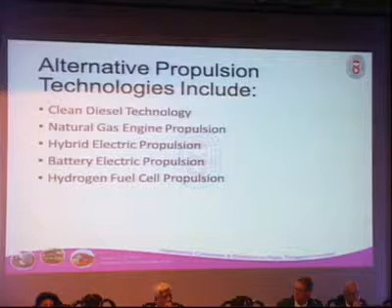When we talk about alternative propulsion technologies, in general we're talking about clean diesel technology, natural gas like CNG, hybrid electric, battery electric, and hydrogen fuel cell. Most of my discussion is going to be on the last two, battery electric and hydrogen fuel cell propulsion, which is where we're focusing in the U.S. with what we're calling zero-emission buses.

Over the years, the United States federal government has provided a lot of programs that have facilitated the growth of these zero-emission bus technologies. As they move into the commercial market, there are ways that our Federal Transit Administration can expand its role in promoting these new technologies, in addition to their capital support for deployments.

I'm not sure if you're aware how buses are bought in the United States, but the federal government funds 80% of the bus purchase, and the transit agency is responsible for 20% of that cost. So the federal government takes a big role—they're taking a lot of risk in these vehicles—so it's in their favor to really implement some of these programs to test out these new technologies.

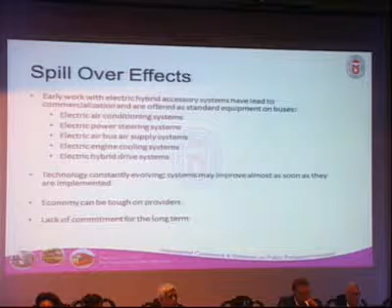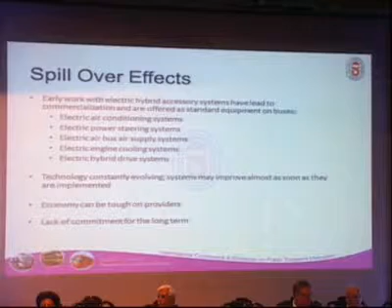And the positives are noted at the top. They're not only important to transit, but also to heavy and light-duty vehicles as well. A lot of these have been tested and there's been an effort to transition some of this technology into the personal vehicle route as well. The last three bullets are some of the negative ones.

It's constantly evolving, as I mentioned. The economy is tough, and there's a lack of commitment, and we still need that commitment.

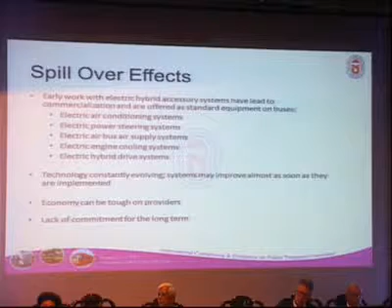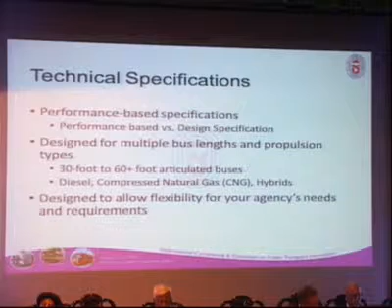I'm going to quickly go through these last couple of slides since I've hit my time limit. One of the things we've done is develop standard bus procurement guidelines, a single guideline meant to standardize a lot of the components and language used in procuring these vehicles. This makes it very consistent so that when transit agencies put together their requests for proposals, manufacturers know what to expect and can give a proposal based on performance, not design. This allows transit agencies to simply say, this is how we need this bus to perform, now you design the bus that will meet our expectations and service needs. So they're designed to allow a lot of flexibility while making the whole process easier.

To conclude, now is the time for the transit industry to be on the forefront of the environmental protection movement and to look at climate change. There's a lot of evidence out there supporting this, and transit agencies around the United States are employing new practices in this effort. Zero-emission buses are on the cusp of commercialization, if not there already. Market development for this technology can be accelerated; it just needs proper leadership and industry support, along with the support of all stakeholders involved in implementing, testing, and running these new technologies.

So it's very quick. Hopefully it's a little bit helpful, and I'll be around if you have questions later on after today, if we don't get to them at the end of the session. Thank you very much.

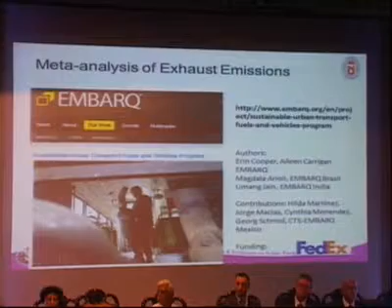These are the vehicle propulsion technologies that are available. Basically what we did—and this research, my colleague Umang Jain is here, received an award at the annual TRB conference last year—brought together data about exhaust emissions from a number of cities. These slides explain why a meta-analysis works; it's not individual testing, but assembling a lot of results from different studies and places, which allows us to give numbers with a sufficient confidence interval.

A lot of these tests were done in international locations, some in Mexico City, and there are a lot of averages involved. Essentially, what the results showed is there is no silver bullet. CNG has its problems, diesel has its problems, and what you essentially need is post-processors, which help a lot. Hybrid and hybrid electric are definitely better than CNG and diesel, but then there's the cost element. You can achieve a lot in cleaning up both CNG and diesel, and diesel with lower parts per million if you use post-processors. The DPF, the D50, the SCR—these are all post-processor technologies that have been used.

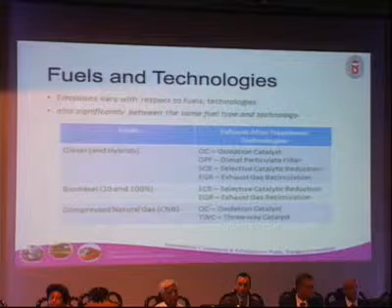So I just wanted to show you, the general finding is that technology and diesel quality are extremely important, and you need to analyze everything in the local context with these three parameters in mind. These are the various post-processor technologies that are available, and I think we really need to find a way to make sure after-treatment technologies are a part of the process. So just giving you examples of parts per million.

Now Europe and others have gone to 10 to 15 parts per million of diesel. This ultra low sulfur diesel is extremely clean, and once you use it with DPF filters, I think you get much better results.

The other thing I've also personally noticed, CNG engine technology, for example in India, has really not evolved. We are using 20-year-old CNG retrofits with clean fuel. Year 4, year 5 performance - this is what I've personally seen in Indore where we've worked closely - year 4, year 5 CNG vehicles perform really poorly. Maintenance costs are sky high, and it's a big impact on the business of the operators.

So that's where, with diesel, they are actually happier to use diesel because it's easier on maintenance as the vehicle gets older. So I think one of the other things is we need to look at life cycle as well, and not just look at the point of time when it's purchased.

And of course, India is also now, the major cities have all moved to 50 parts per million, and now with these NGT orders, etc., we'll move more and more to cleaner diesel. So I think if you want to persist with CNG, there has to be a big push on actually having better CNG engines, because right now we're using really low quality CNG engines and CNG retrofits.

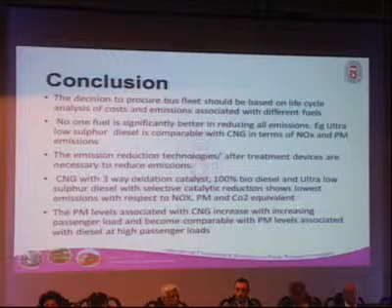Yeah, and just a couple other things I wanted to quickly show, since these are about electric.

A point to make is, I know electric buses are there, but the big problem is our power, our energy is very dirty. If you're going to use dirty coal to run electric buses, that's not going to solve any of your problems. So I think what now, this is something they've been doing in Japan, etc., where they're connecting to smart grids - you need to essentially connect your electric buses to your smart grids. Otherwise, it might still have a positive impact on exposure to criteria pollutants, exposure to PM 2.5 in cities. So you have health benefits, and you are starting to see results from New York, etc., where asthma rates have gone down once they've moved to electric, especially around the major arterials.

But the point being, if you're using dirty coal to make your electricity, then it's like you're just moving the problem from the cities to somewhere else.

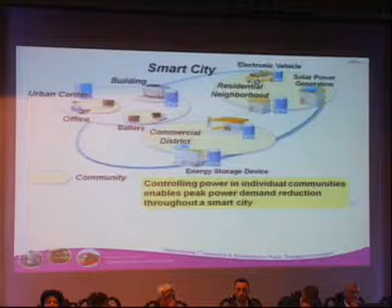And then on biofuels, I think this is also research, I know there was a lot of talk about biofuels. This is actually research that we've done as WRI, mostly from a food perspective. This research was done mainly to talk about a sustainable food future, and food security is a big problem. Based on a very extensive study done in Brazil, it's extremely clear that we cannot use land that we need to grow food to grow fuel. It's very clear, so that's an extremely important point. From that perspective, I think biofuels, it's okay if we're using waste to biofuels, but to grow crop for biofuels or for ethanol is really not going to work from a food security perspective.

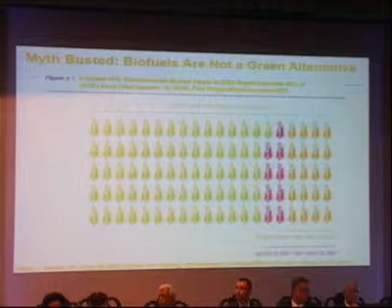Food security is going to be a big problem very soon. Water security and food security. So from that perspective, I think biofuel also has to be carefully thought through. Again, it's nice to be 10%, things that are coming from waste and waste to energy type of stuff. But to grow fuels for crop, there's a huge issue, and I think that needs to be thought through fully.

I'll give you an example from Bangalore, and that will be my last point. BMTC is moving to BS4 and now BS5, which is a big order from the NGT. Everybody has to go to BS4 and BS5 by 2017. Fuel efficiency dropped significantly when they moved from BS3 to BS4, and the cost of that fuel inefficiency was about ₹500,000.

Where does BMTC stand today - the thing is, one is capital cost, the other is operations cost. BMTC anyway, all the talk of profit making has gone in the last couple of years, and this additional cost from the fuel inefficiency became very difficult to justify. So when we're talking about moving to higher cost technologies, we also need to talk about how we make sure the subsidies and the operational subsidies are in place. Otherwise, we're going to have problems on maintenance, etc., and deterioration will be much quicker.

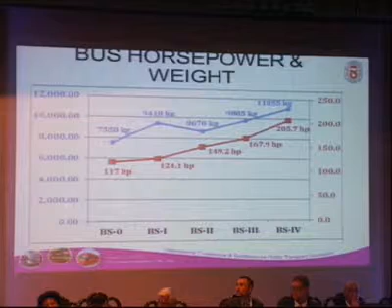So these are the main points I wanted to make, and I'll end on a positive note. Bogota, which is a developing country city, has the largest hybrid electric bus fleet, 200 buses. So it's possible - some of them mostly run in the BRT corridor.

It's possible to do it, but first, I think post-processors are extremely important. So we need to find how we can create a market for post-processors in India. Today there is a single additive supplier who charges exorbitant rates. So one priority is pushing for post-processors and making sure there are multiple suppliers that can do it.

Second, really think about life cycle costs and the impact of operations on the operators, and how we're going to arrange for subsidies to cover it. Third, there are some good progress being made in the electric hybrid space, and we need to figure out financial models to start making them part of our fleet. So with that, I'll stop. Thank you.

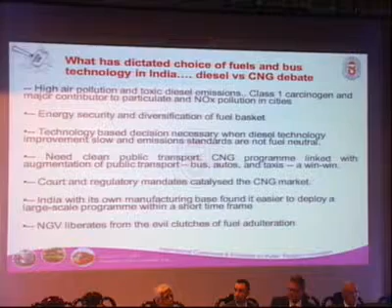CNG also made a lot of sense at that point given huge concerns over fuel adulteration. When this order came, linking clean fuel with public transport augmentation, for us it was a win-win in the year 2000. So this was the data that justified the move, and also showed why CNG at that point was a way to leapfrog our emissions.

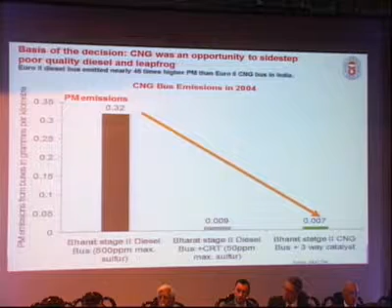What you're seeing here is a study carried out, a test carried out by ARAI along with TERI, which shows how the Euro 2 diesel bus at that point in India was emitting 46 times higher particulates compared to a comparable CNG bus. It also made climate sense, since everything gets tested within the framework of co-benefit.

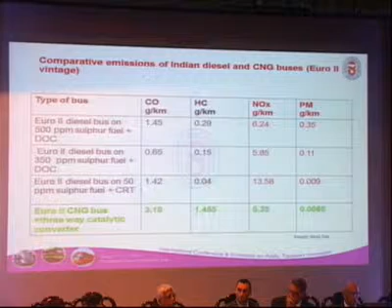So if you look at the data from the same tests, look at the CO, look at all the parameters, it justifies the move towards CNG. There were concerns that whether methane is going to be an issue from CNG, because if you want to take climate as a benchmark to test its success, this very interesting study came up that said that with CNG, methane emissions might have gone up.

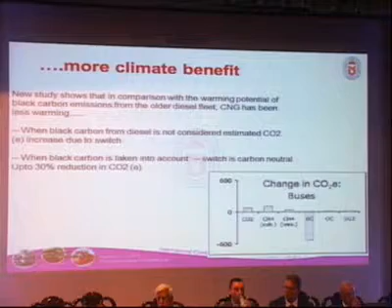But if you consider that the CNG fleet has replaced old diesel fleet, and you take into account black carbon, the warming potential of which is enormous, then at the end of the day the net result is that the CNG program in Delhi could actually reduce the warming potential by up to 30%. So clearly, that was the basis on which we established this program.

There were glitches and there are lessons, because any new technology, any new fuel will require its own ecosystem, its own standards, its own maintenance regime, its own fueling systems, and there were many glitches we had to face at that point of time, but a lot of things were also overcome. And those lessons are there for all to see.

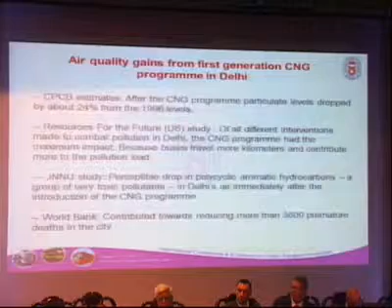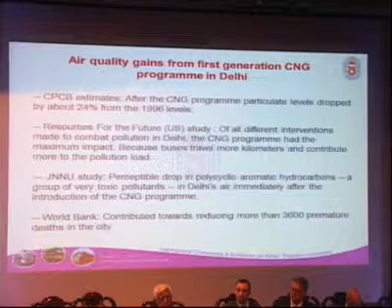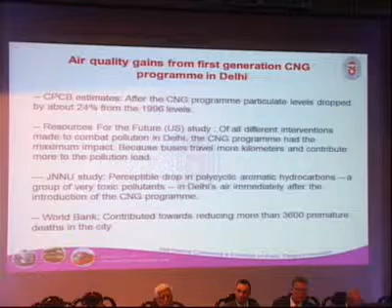And finally, what we got out of that first generation, also the primary driver of this program, was air quality and health. So all these studies, and also the estimates available from the official State Pollution Control Board and the Central Pollution Control Board, make it very clear that we also got the air quality gains.

Now the questions are, that was the first generation. Today we are facing the second generation challenge. We know today that we have arrived at a stage when buses are Euro 4 compliant in many cities. We know that today the CNG program has a potential to expand to several other cities, in fact a very large number of cities. Already 60 cities in this country have access to natural gas.

Now from that perspective, how do we look forward? And how are we now going to make our choices? The first choice was made when we were at Euro 0 level. Now today we are at Euro 4 level, and we are looking forward, and we expect both CNG and diesel to improve. So how are we going to make choices today?

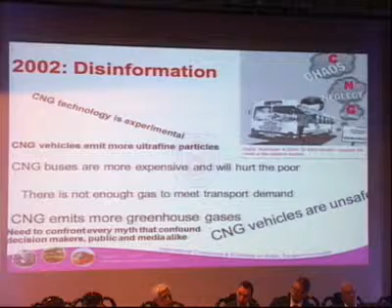All the time, even during the earlier period, we had to face a lot of disinformation over CNG. There was a lot of lobby pressure saying why CNG is not going to work, why there are so many problems with CNG, and it was always about finding fault with CNG, even though today all data shows that we have got enormous air quality and public health gain from that program.

So just a few days ago, the media again became abuzz with one statement from CSIR based on one of the very recent studies claiming that CNG emits more nanoparticles than diesel. And therefore the red flag was up, and the entire media again hit the same controversy. So when we delved and investigated, trying to find more about this study, we were actually pleasantly surprised. When we got the data from CSIR, we found, and we were very surprised, that the right messages had not been given out from that study.

If you compare all other parameters, and in fact we have not done this comparison, it is a CSIR study, the data actually shows that the CNG buses are already pretty close to the levels we have for Euro 4. Where they made that observation about ultrafines being more than diesel from CNG is when they compared this with an advanced Canadian bus meeting the 2010 heavy-duty emission standards of the US, fitted with particulate traps and SCR. Compared to that, they found our conventional CNG bus emits 12 to 40 times higher ultrafines than that Canadian bus, but our Euro 4 diesel bus emits 28,000 times higher ultrafines than that Canadian bus.

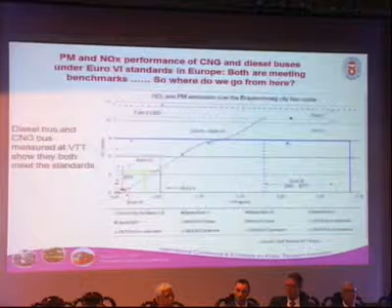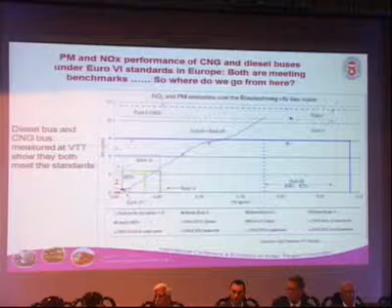So from that perspective, let us be very clear that the data from them is very powerful. And therefore, when we looked around the world at the VTT study for NOx, for PM, for ultrafines, and looked at where all the current bus models are, it is pretty clear there's an enormous potential of that technology to deliver on emissions and environment. And this is fascinating to see at what level diesel buses begin to become comparable with the CNG buses. I'm not going to read this out, but it's pretty clear out there.

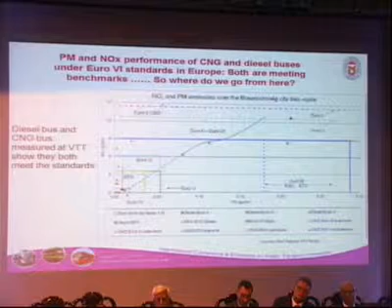Now the point is how this technology roadmap is evolving in this country. The matter of concern is that we still do not know when the Euro 6 emission standards are going to be in place, because the Government of India has not announced the emission standards roadmap yet. So we do not know when clean diesel is coming with the trap. If Euro 6 comes in 2023 or 24, or Euro 5 in 2021, that means for another 5 to 6 years India will not have clean diesel, and if that technology does not evolve to address the issue, that creates more opportunity for CNG.

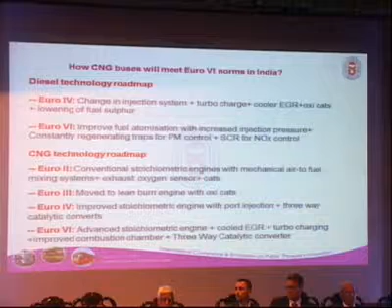CNG technology has already evolved. If you look at the CNG trajectory, and I will differ from Madhav on this, we have moved from the simple conventional carburetor to first the lean burn, and then post-2010 we have already moved to the more improved stoichiometric with three-way catalytic converters. So the data shows that the technology we have today has much better potential to meet the tighter standards more easily.

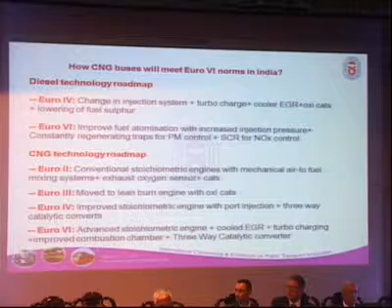This is a question we looked at, just an example from one company: when a bus operator has to decide, and has the option of accessing CNG, they have to look at the complexity of the technology to meet the same emission performance. With CNG, just by improving lambda control, three-way catalyst, and engine management, that's how CNG will move ahead to meet Euro 6. Whereas the complexity of diesel after-treatment, starting from the oxy-cat to the particulate filter to the AdBlue injector to the AdBlue mixer to SCR, and understanding what this complexity means, it's not going to be easy, both in terms of maintenance.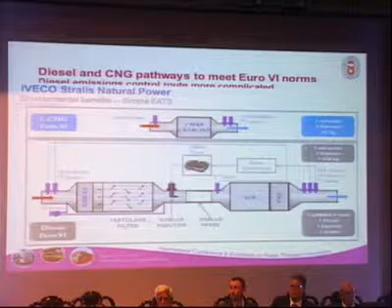So much has been said about maintenance of CNG, because we do not have diesel buses today with complex after-treatment systems. But when we begin to get that technology, given the maintenance regime that we have in the state bus transport undertakings, it is going to be an enormous challenge.

So finally, what I would like to say is the message is pretty clear: cities that do not have CNG will certainly have to leapfrog to Euro 6, because only at Euro 6 level do you begin to get effective reduction in both particulate matter and nitrogen oxide. But if you do that, it is absolutely essential to have a very stringent in-use compliance strategy. We know there are challenges with low-load, low-speed urban driving conditions, where for some time your after-treatment devices are not going to work effectively, and you will have uncontrolled emissions.

And at the same time, complexity with urea refilling etc. will be a challenge. Those who have access to CNG, it makes immense sense for them to move on the CNG path, and there are a whole lot of other alternative fuel options emerging today that cities should be looking at. Of course, for CNG cities, you would also require a maintenance regime, but we need to keep in mind this will be much simpler than managing diesel technology in the future. Efficiency is also an issue we've just heard about.

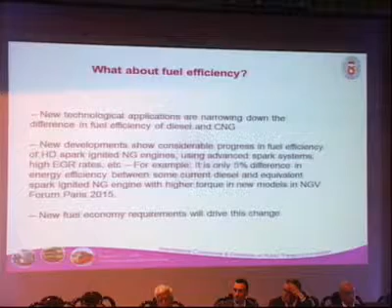But if you look at how the technology is evolving today, we are seeing a dramatic narrowing of the efficiency gap between CNG and diesel. In fact, in the very recent demonstration by Scania, we found it was nearly 5% difference between their CNG model and the diesel model.

So my final point is that bus technology is evolving dramatically, and we will have to benchmark that. It is absolutely essential that we understand the cost and technical complexity of both diesel and CNG. CNG certainly shows a much simpler way of moving forward, but this does not mean we are saying it's CNG versus diesel. We want a fuel-neutral approach, and we know a fuel-neutral approach happens only at Euro 6 level. So instead of fighting this as CNG versus diesel, please demand a quick leapfrog to Euro 6 - that's where the community has to become unanimous in making that demand.

And with that, for all alternative technologies that we are going to be discussing today, not just CNG, be clear: we need a legal mandate, we need fiscal and regulatory measures for market development, we need favorable taxation policy to make them compete with cheaper and dirtier mainstream technologies. That has to be the focus of moving forward.

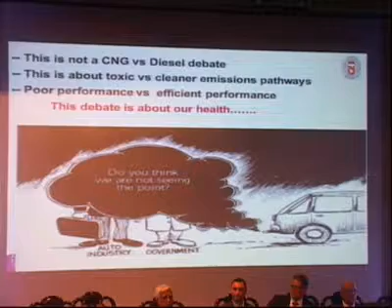So clearly, this is not a CNG versus diesel debate. This is about toxic versus cleaner emissions pathways. It is about poor performance versus efficient performance. This debate is about our health. Thank you very much.

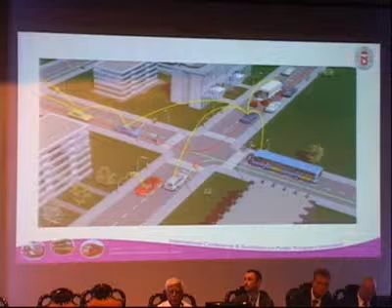Today we see that the environment is really going from bad to worse, because the oil usage left is only for half a century. 56% of the world's oil consumption is from transportation, and 95% of the world's transportation is powered by fossil fuels. So we are really consuming what we have in short supply. Therefore, we need to use it well, and we really need to see how we can preserve it for the essential commodities and the upcoming generations.

But what we can do is look forward to why alternate fuels, because alternate fuels today for us are environment friendly, they are clean and sustainable, and they look forward to supporting us in preserving the conventional fuels. We have the requisite technologies today available with us which can really cater to our requirements and applications in different industries.

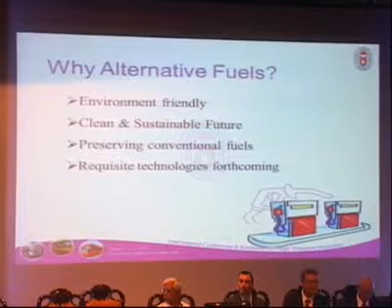Recently, just about a year back, there was a study done across 40 different countries where they looked at all different kinds of fuels being used. Different countries, depending on applications, cities, their demographic and geographic requirements, gave this data, where people feel that whether it's natural gas, hydrogen, hybrid or electric vehicles, or biodiesel, would be the real solutions in the future.

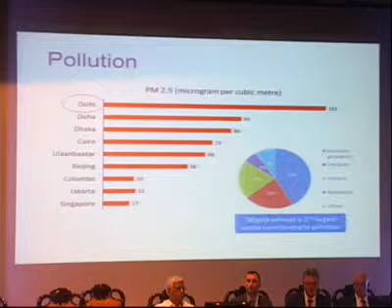Because today when we see key cities across the world, Delhi is considered the most polluted city, where the PM is 153, and just now few people were talking about bringing it to less than 15, which is something we are looking to move towards. But is that really going to happen without taking certain steps? That is very essential for us to really make these moves, whether by SRTUs, whether by governments, or by us as a public.

Alternate technologies are key. Today we have many possible approaches, but how many of them are viable? Any particular customer or end consumer is looking for something very sustainable, scalable, and affordable, with the right level of safety and comfort. So how are we able to give that kind of safety and comfort at an affordable level to people in India? The challenges across different cities really require a unique solution, so we have to see which technology can be adapted by us.

Today current trends are that in different countries, hybrid and electric vehicles, fuel cell, ethanol and biodiesel based vehicles are being used. Even today we see a few such vehicles here, as the Honorable Minister shared his vision this morning, and how the government is moving towards that and is bent upon making it happen. But how we as an industry, whether as manufacturers, end consumers, laymen, or as SRTUs, are gunning towards it, that is the key.

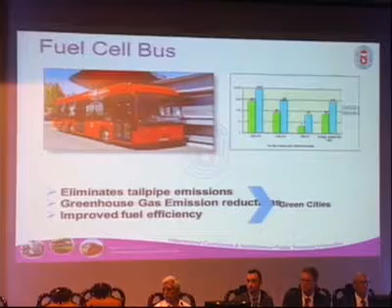If I talk about fuel cell buses, definitely they have their own benefits: elimination of tailpipe emissions, improved fuel economy, leading to green cities, and greenhouse gas emission reduction as well. But is it affordable today? Is the kind of infrastructure which needs to be put in place there? How are we able to do it? These questions arise.

Then we talk about green mobility, mainly coming from electric and hybrid buses - how the zero emission operations, or the diesel auxiliary power unit, or the range-extending system with the diesel engine is there in the battery bus. But as we heard before, are all these things coming with the right source of generation of energy, even if it's an electric vehicle? That is very important - how we are really seeing the right source of energy for generation, whether it's coming from any renewable resource like solar, wind, or so forth. Only then are we actually giving a green vehicle with the right technology, because ultimately the environment as well as health is a very important factor for the public.

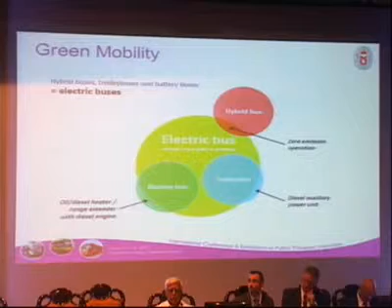The complete supply chain needs to evolve - we need to see how we are able to bring costs down, how technology is evolving daily, how it's becoming affordable for the end consumer, and what really makes sense for the whole ecosystem, whether it's charging, the supply chain, the ultimate product, or the operational aspect. All these are big challenges which need solutions from us today. But all these solutions would not come just by looking at a complete ecosystem solution in one go - we'll have to take requisite steps for the same.

Today when we compare diesel, CNG, hybrid, and electric, we clearly see there is a big cost saving in terms of energy in case of electric, and partially in case of hybrid. But how are the SRTUs able to buy such buses and ply them on the roads? How is the complete team of drivers and operators going to use these buses, and how will training be imparted to them - that's a big question mark.

But more than that, I think even if we get these vehicles on road, the big question lies with the charging technologies, because the whole ecosystem needs that kind of support. The government would need to give that kind of long-term vision to the people, as we heard this morning from the Honorable Minister. If we talk about the cable and plug technology for charging, it needs 16 to 100 kilowatts of charging power - so are we able to give that kind of quality power?

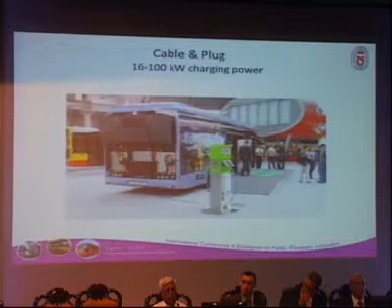Similarly, the pantograph solution, which is spreading very well and is a solution of choice in Europe, but the infrastructure needs to be put in place - it's a dedicated corridor where multiple different vehicles can charge with the pantograph solution. But the power requirement is about 450 kilowatts - so are we ready for that quality of power at that source level? Because with one system deployed, it's a one-time investment, and then on an ongoing basis we can get the benefits, and those benefits can be reaped by multiple application vehicles.

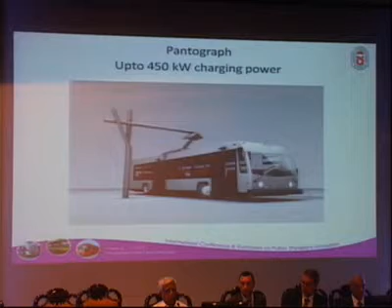Similarly, we talk about induction charging. It needs about 200 kilowatts of charging power, but the technology is evolving and still not stable. The know-how people need, as well as the system which needs to be deployed, is very cumbersome. So there's still a lot of time and money which needs to be invested in this technology to make it more affordable.

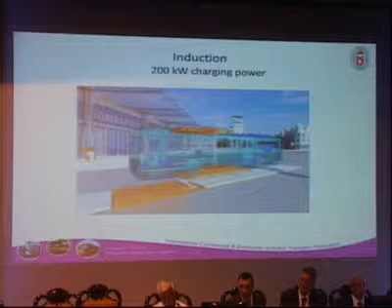But ultimately we need to see, from our perspective as an industry, how we are giving a solution which is economically viable. So if we compare diesel, CNG or electric, we see that the running cost, operating cost in electric vehicle is about one-third of diesel and about half of CNG or hybrid. That is the right solution which I feel can be good for a country like India.

But we definitely have to see how we can localize such products, how the infrastructure can be provided by the government, and how a sustainable and scalable methodology can be deployed. New schemes like FAME and the upcoming NEMMP will be testimony to what the government is looking for in the future.

With these kinds of buses, we see that fuel saving is about 81% more than the diesel bus and about 47% more than the hybrid bus.

The Prime Minister has already spoken a lot about the import of fuel. How are we going to cut down the import of fuel? Because more than 1 lakh crore can be saved over a period of time, which can be used for multiple applications, developing the right kind of infrastructure, and bringing the right companies to invest in India with the Make in India programs.

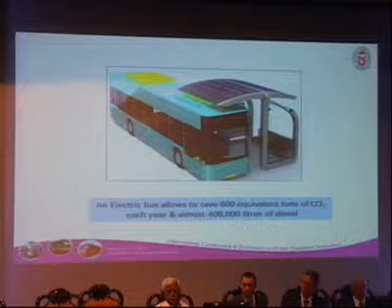Also supporting operators with maintenance cost reduction, energy cost is going down by more than 60%. But today, more than that, being an environment-friendly product, we need to see how it is saving emissions - whether we talk about 4 lakh liters of diesel per bus or about 800 tons of CO2 which can be saved with such products. So I think that is a focus we need to have.

If we are looking for a one-off solution, that would not give the right perspective. We need a holistic approach where the complete ecosystem is set in place with the right steps taken on an ongoing basis.

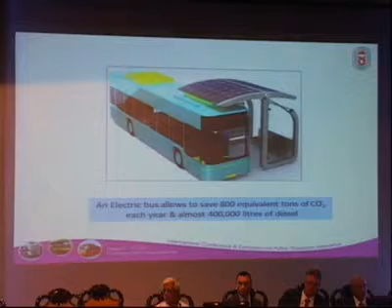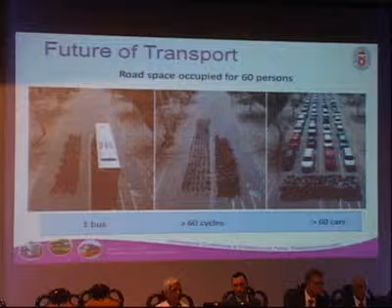This is one comparison I really liked - how transportation is evolving in India. On one end you have 60 cars with about 1.5 people per vehicle, or 60 bikes with people driving those, versus one bus. We really need to see how public transportation is the choice of the future, as we heard in previous sessions. Most developed countries show that people from any side of society - middle class, HNIs, or lower income groups - are always more comfortable using public transport, whether it's a bus, metro, or other applications.

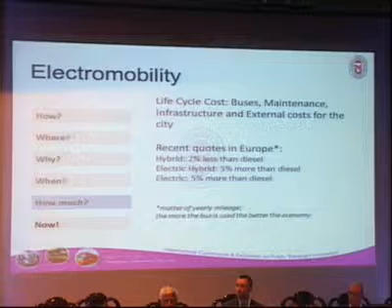Our global experience - we have had hybrids. It was mentioned before, I think over 400 hybrids in Bogota are operating. Curitiba and Mexico City are other major hybrid cities with a lot of hybrids in traffic. So as I said before, this is a mature technology. We think it's perfect.

Regarding the next step, the electric hybrids, you've seen the Stockholm bus before. Hamburg started in December last year - they run on a specific line with this concept. And Gothenburg actually started just a couple of months ago.

And the Gothenburg project also includes other aspects. Someone mentioned Wi-Fi on the bus. In this project, we also have Wi-Fi on the bus stations, so the young people are never disconnected.

I would say thank you at this stage. As I said, 2,141 hybrids sold so far. That gives us confidence to continue the journey of electromobility. Thank you for letting me speak here.

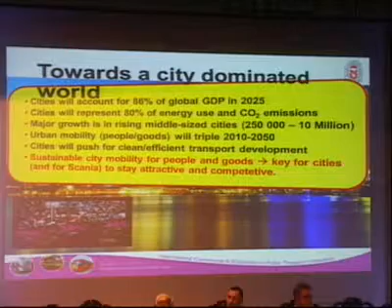Solutions for sustainable transport - of course there is not only one solution, there is no silver bullet. There are many solutions we must combine, but we can divide them mainly into three groups: we must have smarter transport for people and goods, we must save energy, and we must also replace fossil energy with renewable energy.

We've heard a lot about smarter transport today, so I won't go into that, but I will mention one thing - comparing the BRT system and the metro system. The BRT system in Bogota has a capacity of 45,000 passengers per hour, and cost $5 million per kilometer to build. Compared to the metro system in Mexico City, with a capacity of 39,000 passengers per hour, but costing more than 8 times as much per kilometer to build.

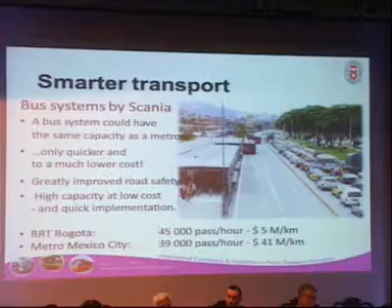The second part in sustainable transport is to save energy, and we've heard a lot about that today. One thing that is very important is the driver. Training the driver can easily reduce fuel consumption by at least 10%. On average, for truck drivers we've educated through what we call Ecolution by Scania, we reach about 15% fuel reduction. So the driver is very important when it comes to saving energy and fuel.

Scania also works on hybrid technology. We launched our first hybrid city bus last year, and this will continue now for Euro 6. We have hybrids not only for diesel but also for biodiesel, and other renewable fuels will follow. We're also doing tests with inductive power and with the pantograph, and today we're already running trolley buses in Sao Paulo.

But I will say one thing regarding electricity: to be cost efficient and commercially viable, electrification has to be part of a large-scale industrial modular system. It has to be planned, it has to be built in a large scale.

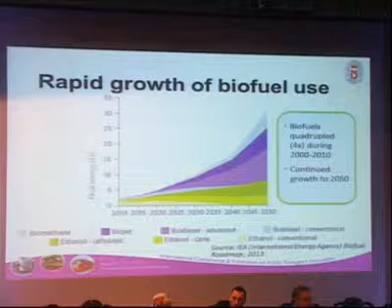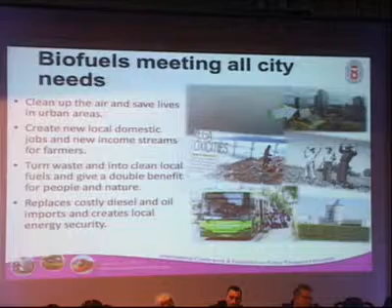Scania has, for almost 20 years now, focused on developing vehicles for biofuels. Today we have buses and trucks for the three major commercial renewable fuels in the market: ethanol, biodiesel, and biogas, and of course also CNG, natural gas. Bioethanol and biogas have the most CO2 reduction capacity today - I should say more than 90% if it's good production.

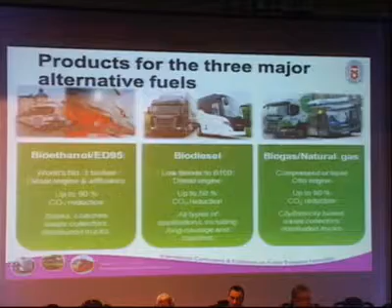Biofuels also meet all city needs in terms of transportation capacity: using bio-CNG in the inner city and suburban areas, and then in the regional and outside-city areas using ethanol.

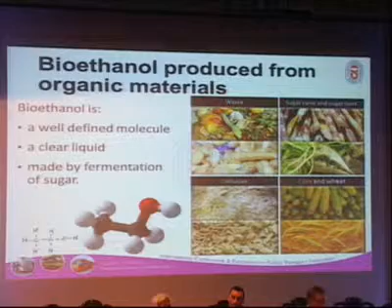Biogas is also produced from organic materials, but not from fermentation - instead from anaerobic digestion, meaning the process continues without adding or supplying oxygen. Methane is also a very clean, defined molecule. The methane from biogas and from natural gas is the same methane molecule, but natural gas comes from fossil sources.

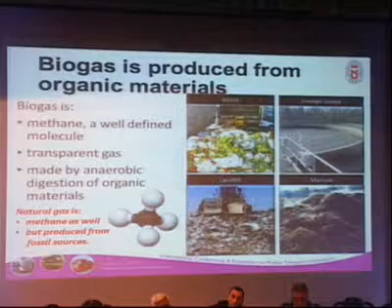How do we produce the fuels? As I said, we start with organic waste or organic material. For biogas, we use anaerobic digestion to produce methane. This gives us the first step, raw gas, containing 50 to 65% methane. This has to be upgraded for use as a vehicle fuel by taking away carbon dioxide and hydrogen sulfide. Then we get biomethane or bio-CNG at a content of about 97%. For ethanol, we use the same material with a fermentation process, then distillation to take away the water, giving us about 95% ethanol.

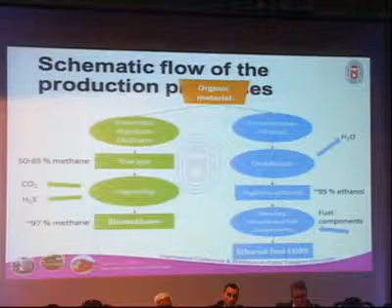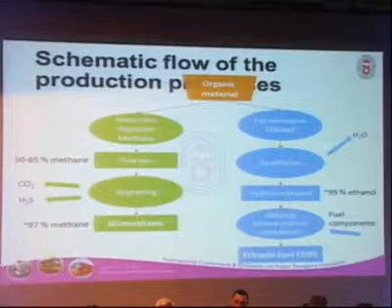The ethanol we use for the bus, you have seen the green bus outside here. The Scania ethanol bus uses this ethanol, 95% of ethanol with 5% water, and then also some fuel components in the fuel. The fuel is called ED95, it's a global name of this fuel. In Sweden we have been running this for 25 years, and Scania have exported ethanol buses to cities in more than 10 countries now.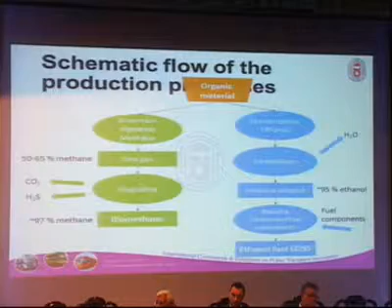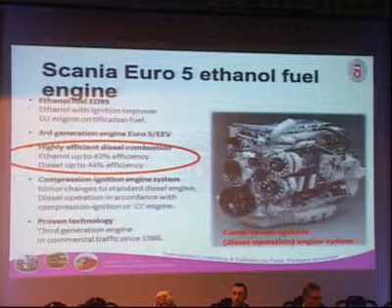The ethanol engine is a compression ignition engine. It's not the Otto or petrol engine with spark plugs, it's a diesel functioning engine. And why a diesel engine? Mainly because of the high energy efficiency. With ethanol, we also reach almost the same energy efficiency using the diesel technology.

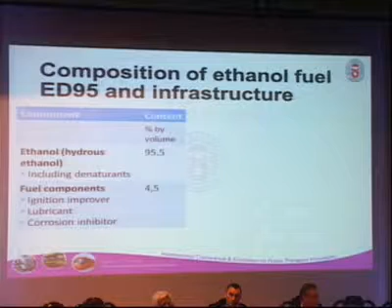The composition of ethanol is 96%, and the rest is fuel components. The infrastructure is the same as for diesel and petrol, so there isn't any new expensive infrastructure that has to be built. We can use the same type of infrastructure.

There are some differences in the properties: cetane number, biofuel content, and also the energy content are different. Otherwise, it's a liquid fuel. Ethanol ED95 should be handled as petrol - that's the difference compared to diesel.

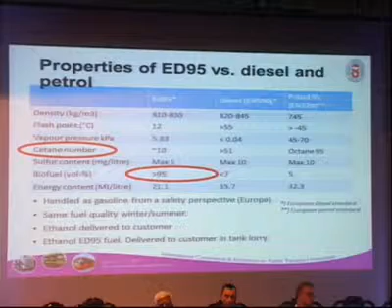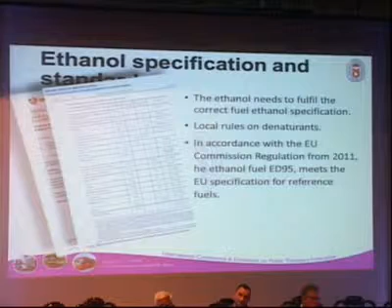Today there is a very well-defined specification of the ethanol that should be used. The ED95 fuel is also a certification fuel for the European market, so we can certify our engines on this fuel. There is also a Swedish standard, and I know that in South Africa they are working with a standard on the ED95, and also here in India this work has been started.

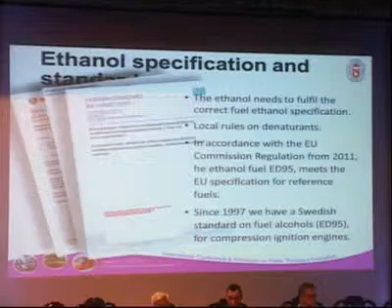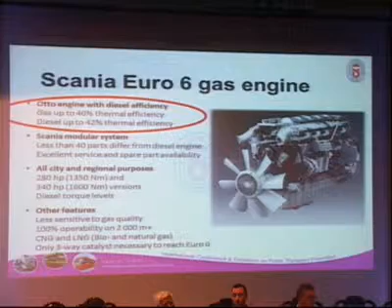The gas engine is an Otto engine, and this engine is for Euro 6. I forgot to say the ethanol engine is for Euro 5 so far. This gas engine is Euro 6 with almost the same energy efficiency as Euro 6 diesel, which is the best gas engine so far in the market. Also the torque and power is almost the same as diesel, a little higher in the RPM over 1300.

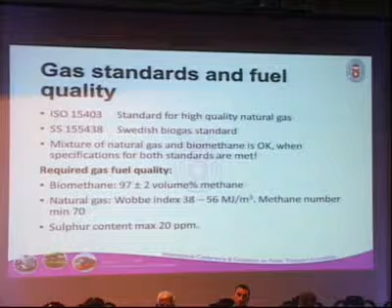To mix biogas and natural gas is of course possible if you have a grid with gas in the city. But the standards have to be met for both fuels before you blend it. The gas fuel can be supplied in compression or in liquid form.

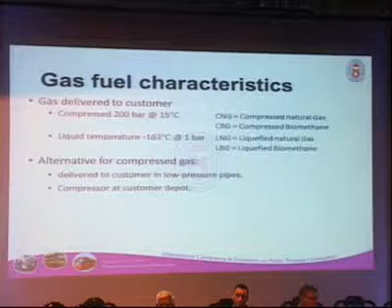As I said, the biomethane engine is Euro 6, and today's ethanol engine is Euro 5. But the Euro 6 ethanol engine we will launch during next year.

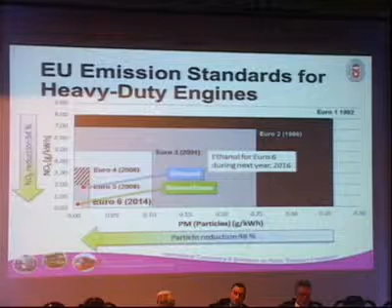So, conclusion: growing cities will push for clean and efficient transport development. Clean, sustainable biofuels in public transport are here and now - we don't need to wait. We can use what we have and then develop better technology, but we should use what we have today. Easy and cost-efficient technical solutions and infrastructure - as I said, ethanol is equal to diesel and petrol in respect of infrastructure.

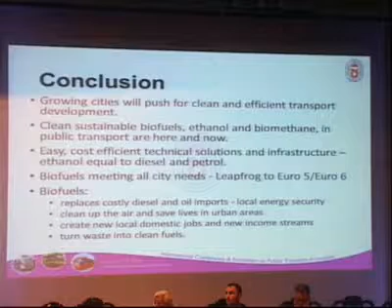Biofuels meeting all city needs, leapfrog to Euro 5, Euro 6. And then also biofuels have a very positive effect on the economy and social factors, especially turning waste to clean fuel - I will point out that is a big challenge and a big possibility. Thank you very much.